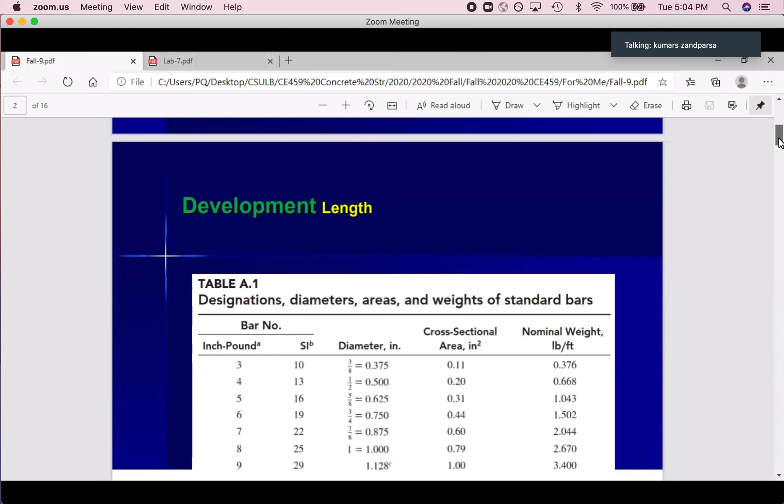Okay, so let's start today. Sometimes I put things inside the slides because we need this, and you have access to areas and diameters and everything. Today I'm going to talk about bond and development length. The easiest way I can give you information to understand what it means is like this.

Imagine you have a nail just inside a piece of wood. In order to take it out, how much force do we need? If the penetration is just 1/8 of an inch, do you need more force to take it out, or if you have 2 inches in? For sure, if you have 2 inches of embedment inside this wood, you need more force to remove it. If the diameter of this nail is 1/8 of an inch, or if it's 1 inch, which one needs more force? For sure, whenever it's thicker, when the diameter is bigger, you need more force to be able to take it out.

That's it, if you got this, that's the meaning of development length and bond. So if we have rebar inside the concrete and you want to take it out, the diameter is important, the bonding between these two is important, a lot of stuff. So we call that development length, the length that we need to make sure that the rebar can reach to Fy, like here.

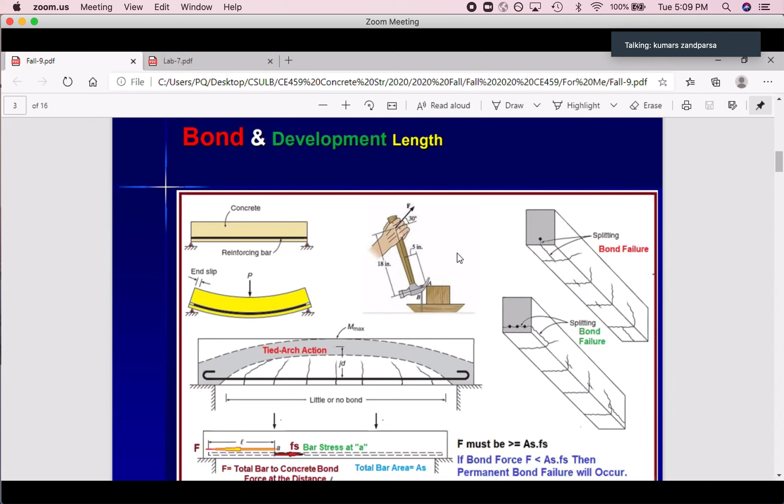So the bar has up and down on the surface, so those can go inside the concrete and increase the bond. That's the bond part. And development length, as I told you, is the minimum required length to make sure that the rebar can reach to Fy. So that's an important thing that we should carry.

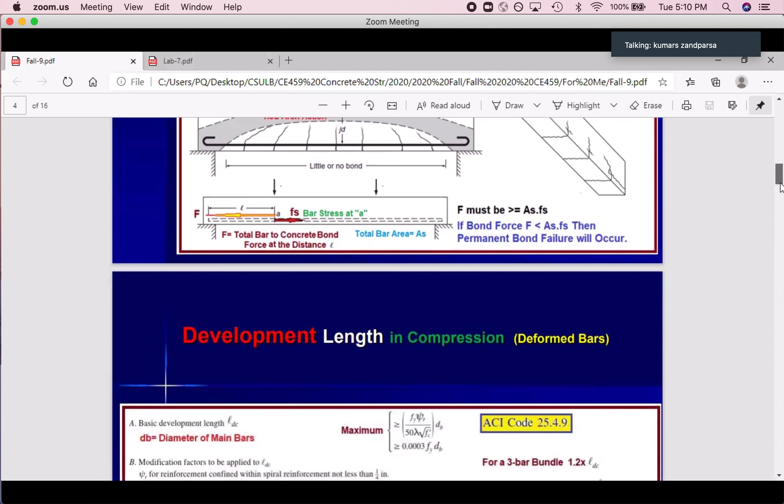So how can we calculate that? They did a lot of tests all around the world, and ACI actually put them together, all the results. During the past 100 years, they collected all this information, and a lot of committees worked on those, and they finally made some advice that right now we can use as an engineer. All of us can use this stuff in our design.

So we know that we have different kinds of elements, like columns. You can see this is one of the rebar columns for one of the bridges. Those are huge, and they have to tie them together on the ground and then stand them up by crane and use them as a column. So columns are in compression.

Look at this. This is a column with tie bars, and this is a column with a spiral. So any kind we can use.

So if you want to find the development length at the time you have a splice between the first story column and the second story, you have a roof. Let me plot this, this might be important. Consider this is your roof, or the beam for this level, for the floor that we have. This is the column on the second story. This is the column from the first story. So the rebar from this part should go inside this and go here, inside this, and then splice them for the second floor, something like this. I made that very simple to understand.

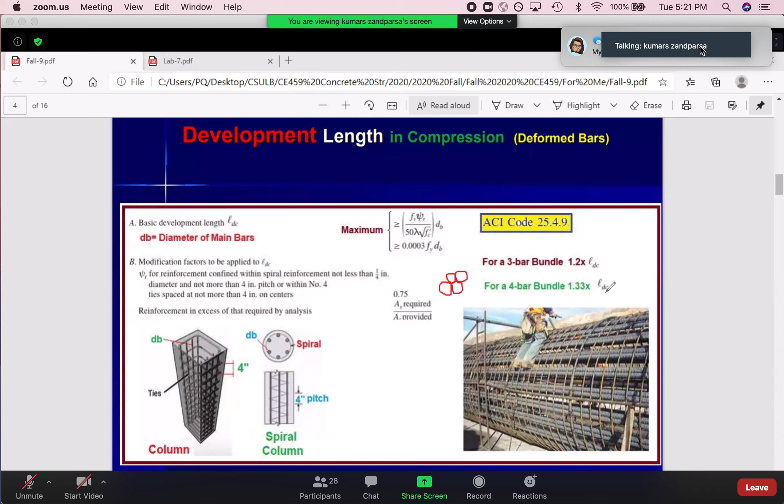So in this case, how can I find the development length in compression for this bundled bar? I have to calculate the LDC and times 1.2 for a 3-bar bundle; for a 4-bar bundle go with 1.33 LDC. So calculate that for 1 bar, whatever it is, number 11, then increase that 20% if you bundle 3 of those, or increase that 33% if you have 4.

So it's not that big a deal, we just have to do this based on the code.

So required 20 divided by provided 22, for example, that's less than 1. That number times the maximum of these two, times L, would be your final development length required. So we can use this reduction factor based on the code.

As required. Yes, what's the question? Is that reduction factor only for bundles? No, that's based on your design. It should go for any kind of development length in compression - good question. So you design the column, you need 20 square inches, but you pick the size of the rebar and notice that you use 22 square inches. So you can go with 20 divided by 22 times LDC, final LDC between the maximum of these two. That's your minimum required development length in compression for your column.

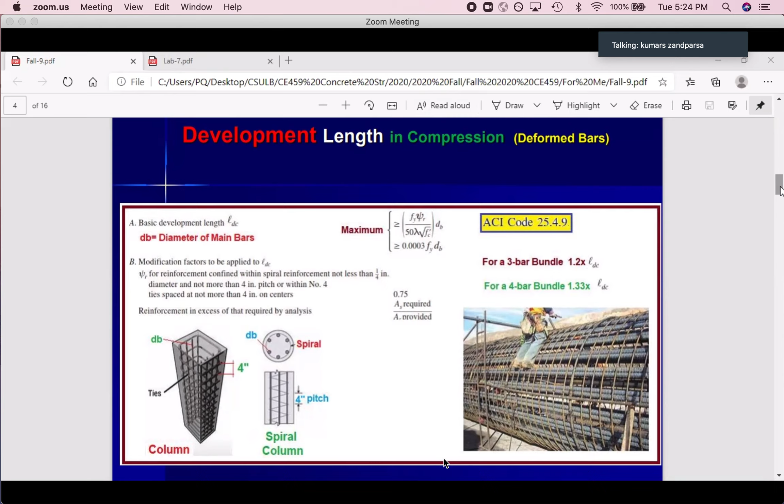Clear, everybody? If you have any question, please stop me and let me know. Otherwise, I think you got it and there's no problem with this part. Even if I pass this slide, if you still have a question on the past slide, let me know and I'll go back and review those one more time.

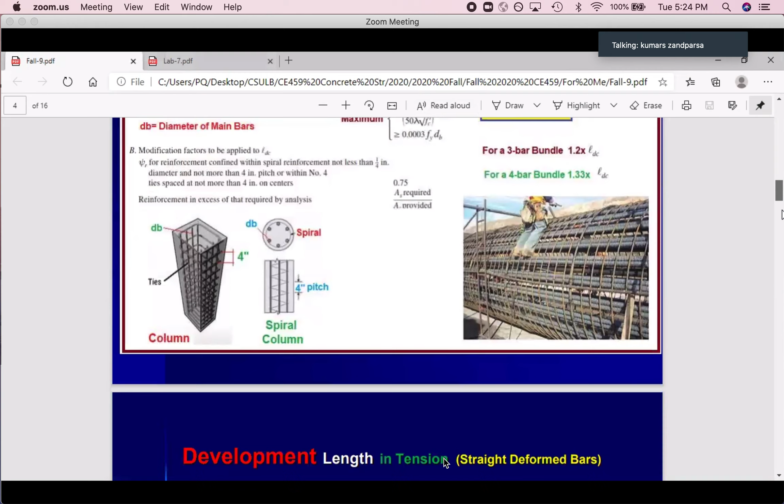Then we go to development length in tension. So in tension, we have straight or bent rebar. If we bend the rebar - in this case we're going just with a straight, with no bend.

For example, let me show you. Assume that we have a huge column, and you have a beam connected to this column, and the rebar that you have is here. This is the top rebar in tension. Bending moment this side, you will get tension on the top bar, negative moment, tension. So development length, you should check this inside the column - that's the development length, from here to here, inside the column.

And also if you are going to cut the bar inside the beam, imagine if you want to do this - this is your development length as well. Don't think about why they are not equal - they must be equal. Development length at each point for tension should be equal inside the column and outside of the column.

So you can go straight, yeah? I have to check if I have enough room, LD development length, with no other stuff. LD is for tension, LDC for compression. It means a straight length like this - sometimes the column is big, so you have enough room for this because the column is big. Sometimes the column is not that big, so you have a huge beam sitting on almost a small column. In this case, for sure, you don't have enough room for a straight length.

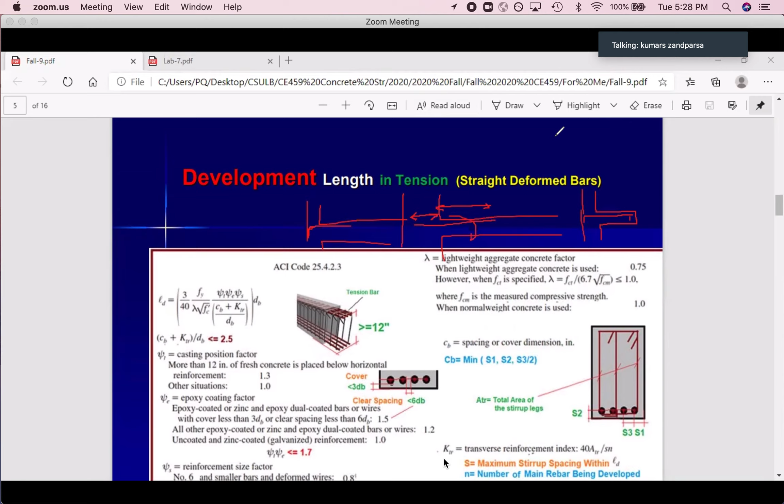Okay, so let's go after the equation. This equation - today I'm giving you a lot of information based on the code. It's not that easy to get them in the first place, but you have to go through the examples, solve the examples to make sure you can read this.

These parts that you can see here, you have to find them in 2 or 3 pages of code. So I spent time to find all those required code that you need and put them in one slide. It's easier to understand this rather than going directly to the code. But in future, for sure, when you read that ACI, your eyes will be familiar with all those equations, how to find them, which part you should look at. So you have to go to that part of the code as well. This slide is good for the start.

Okay, so that's the code, ACI 25.4.2.3. That's the main equation. And you can see there are a lot of parameters. Those are just based on tests, a lot of tests.

Okay, first of all, cb plus Ktr divided by db must be less than or equal to 2.5. So if you calculate this based on what we will learn here, if you got 2.6, then instead of this, you should consider 2.5. Just remember this, these are important. Whenever you see this limit, it means this part cannot pass that limit. If you got more than that, go with 2.5.